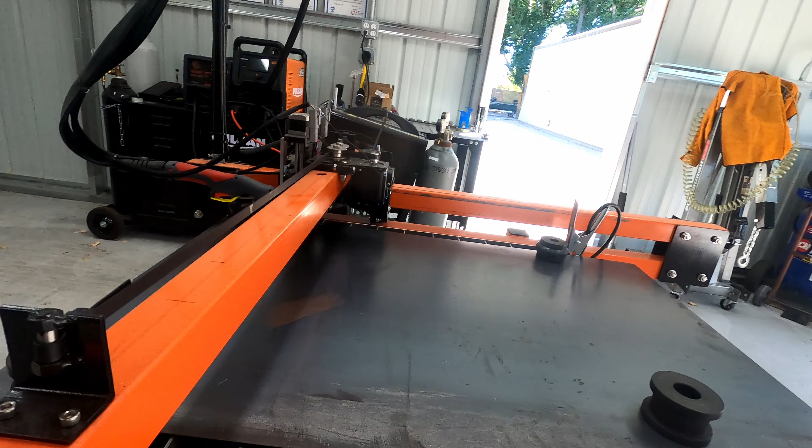So the day has finally come. We finally have power in our new mini fabrication shop. I've been wanting to bring you guys a follow-up on the JD's Garage DIY CNC plasma table. I went ahead and installed a drain plug on mine from some scraps I had lying around, so I can actually just drain the water there. But yeah, so what we're gonna do today, we designed something real quick, and we're gonna finally test this thing out without blowing a circuit breaker. We have dedicated power to the plasma cutter on its own breaker, and dedicated power to the machine. So let's get this video started, you guys.

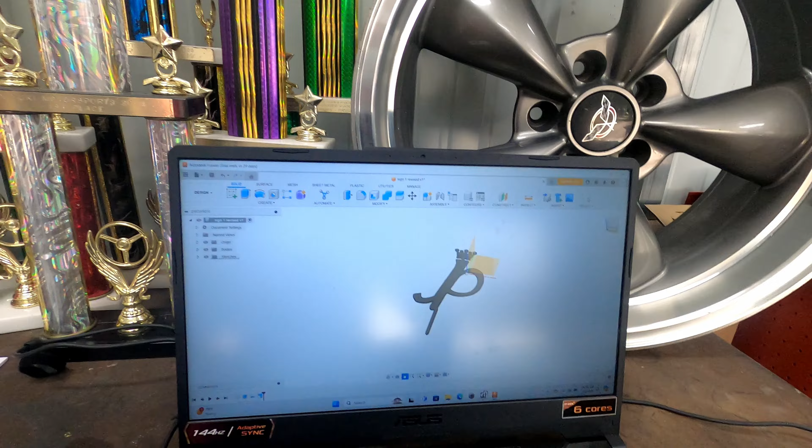Okay, so we got an imported file, something I drew up here of the JP logo. As you can see, we got it in 3 dimensions there, just so we can kind of keep track of what we're working on. We're kind of teaching ourselves CAD as we go along.

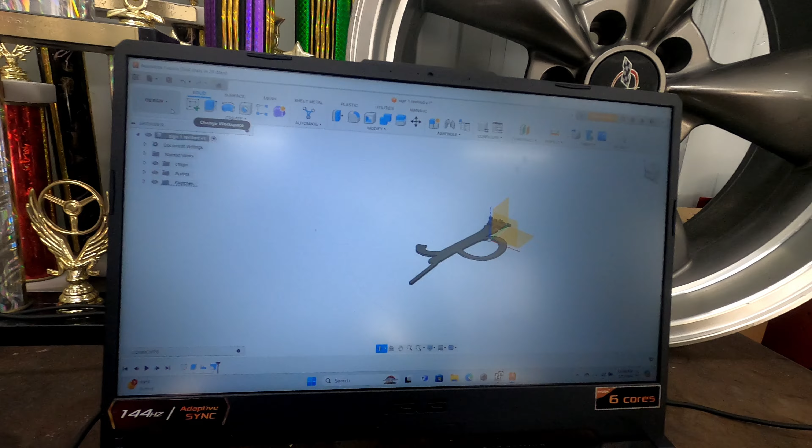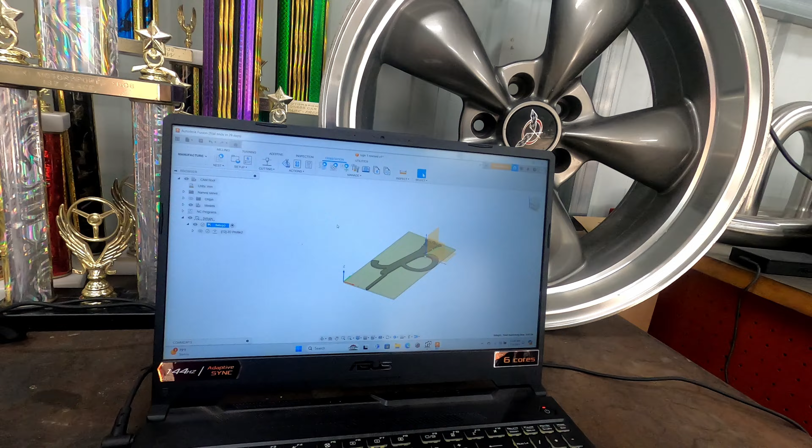So from here, you go into your manufacturing tab. Again, I'm just doing a quick overview of this. This is something you guys should have already watched on JD's Garage. They have an awesome video on how to set up your machine, how to get your G code, how to set everything up. This is in Autodesk Fusion 360, the free trial.

So what we're gonna do is get your G code. After you set up your machine and everything here, you want to make sure X, Y, and Z axis is on the right plane. That's very important, but again, JD's Garage goes over that already, so I'm not going to reiterate it.

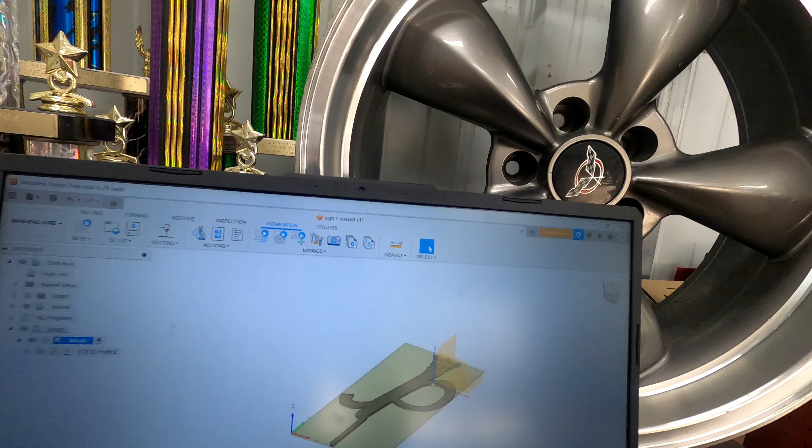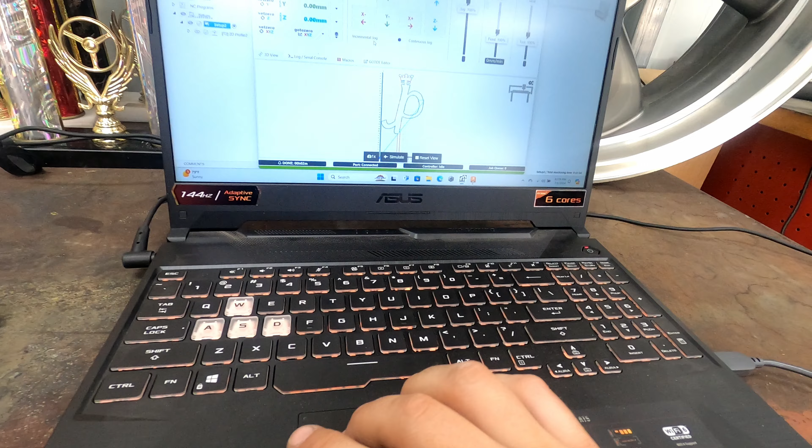So here you go to your post processor, and this will convert Autodesk Fusion into G code so OpenBuilds can read it. Once we have OpenBuilds open, we can upload the G code. As you can see, mine is already there. So you can do a dry run with this, which is probably what I'm going to do just to make sure everything's working properly. I don't have the machine on, so without the plasma cutter on, we can just hit run job.

So you'll have to mess around with your settings. I have my max speed set to 1600 on the X and Y axis. Again, if you're using the Z axis, it'll self-probe and touch off for itself.

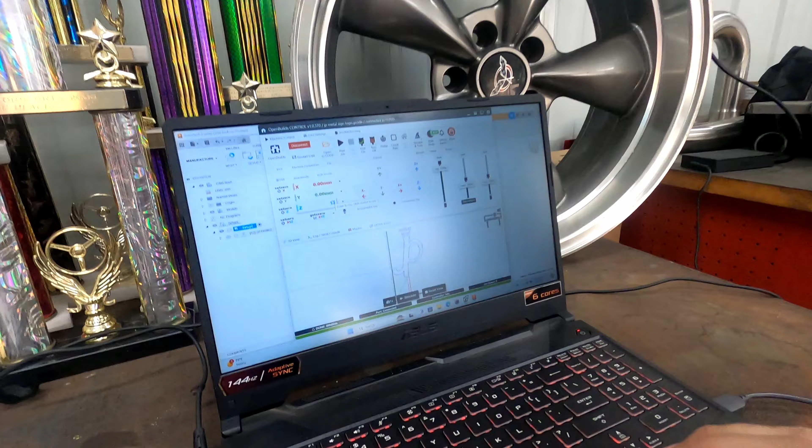Obviously that was sped up for you guys. It should return back to its home position there. It'll be 15 millimeters out on the Z axis because it raises itself. So to get it back, after your test cut, you're just gonna go here, go back to 0.00.

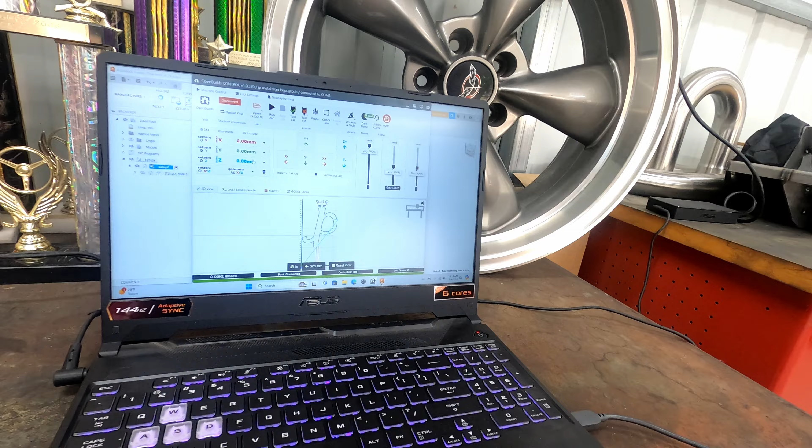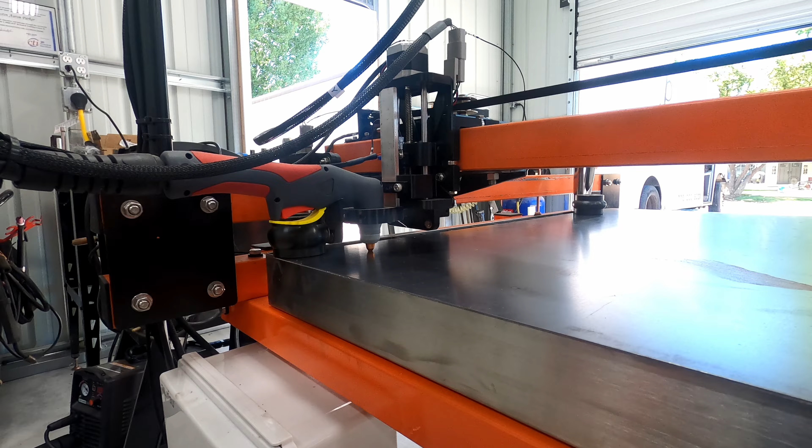And something to note for you guys: you want to make sure that your 0 is 1.5 millimeters above. I had this thing originally touching, and it was dragging, so I had to set my 0 at 1.55 to get it corrected. You'll have to mess around with your settings, especially like me - this isn't the straightest piece of metal here.

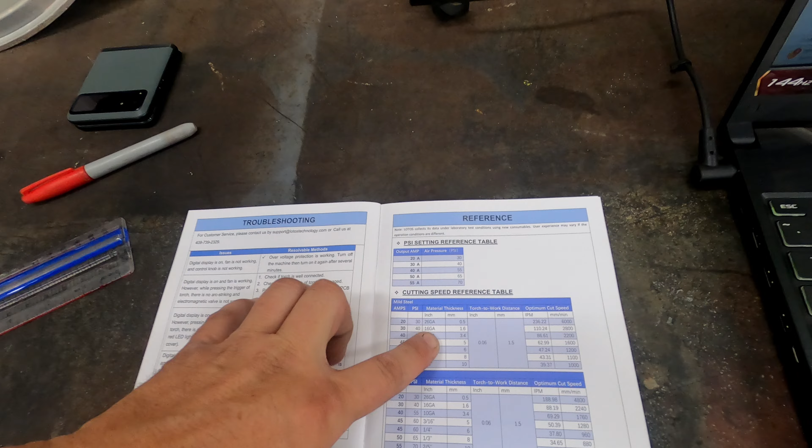On your plasma cutter, you're going to want to look at - we're working with mild steel here. This particular piece of steel is 16 gauge, so we want 40 psi with 30 amps for the cutter. This is for the LTP 5500D from Lotus. Again, you'll want to check your specs on whatever kind of plasma cutter you have.

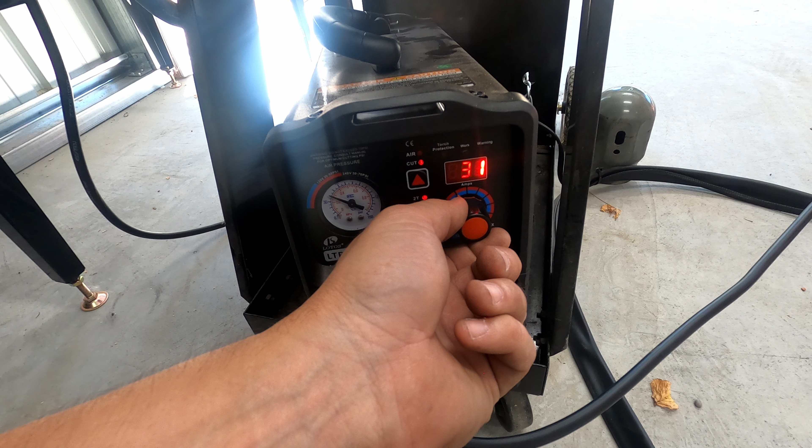We'll go ahead and fire up the machine, and we're gonna give it a go, guys. Let's see if I can find my power button here. All right. We'll go down to 30 amps as it called for. We're already at basically 40 psi. We want the 2T.

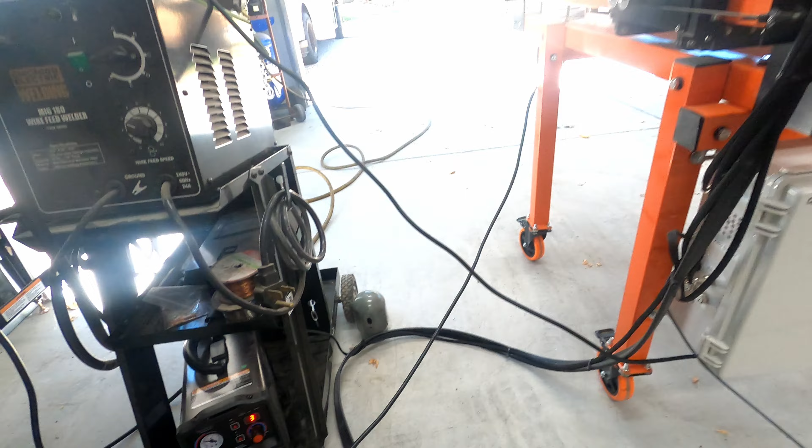Air's going, air's going. So if everything is as it should be, which we're hoping it is, there's no way of really knowing until we try it, guys. So we're gonna go ahead and run the job.

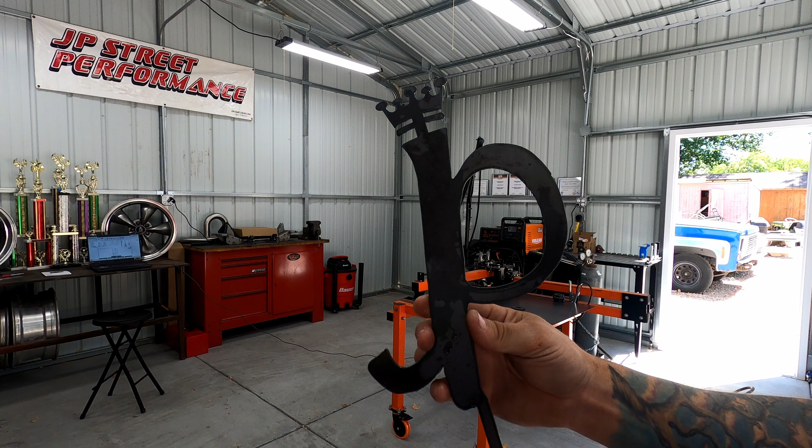Awesome, you guys, awesome. Let's get a good video of this. Look at that. Just awesome, I made a little yard sign. Very good cutting - my artwork, it actually followed my artwork pretty good. Very little slag, a little bit more in the tighter areas, as you can see here. Looks like my angle of cut is spot on, so the machine is really squared.

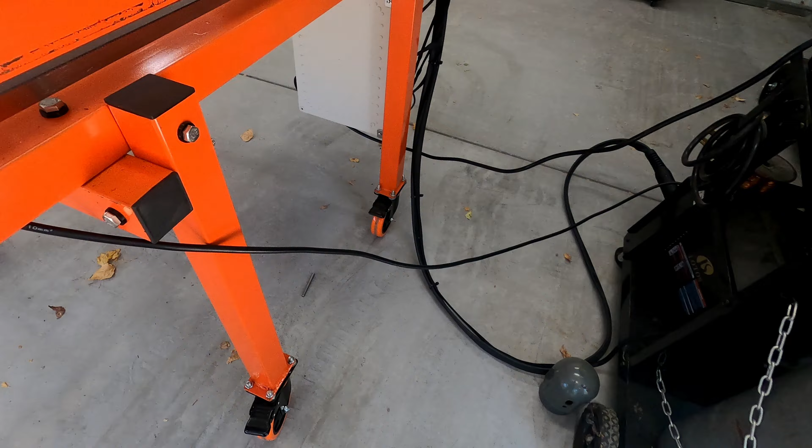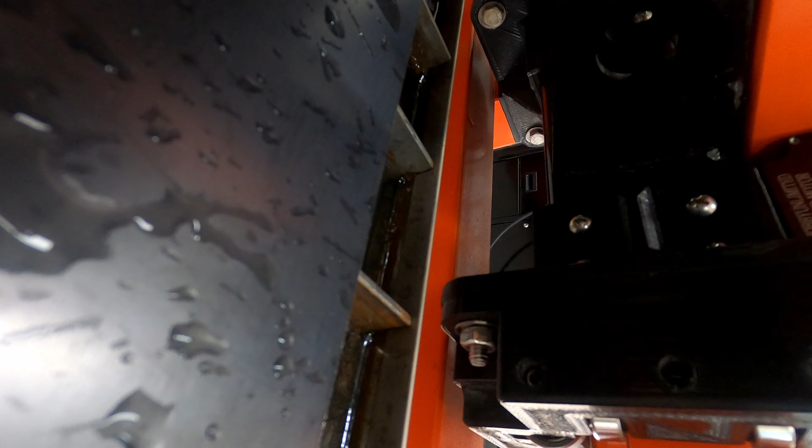So the only thing that happened during this run, and I've been having problems with this, I may have to reorder another part or make a 3D printed part. While it was cutting, and I didn't want to stop it, one of the rods from this side here kept falling out. Bearings are still in there, luckily, but we're gonna have to fix that. These things are basically as tight as they can be, but yet they're still having issues.

Absolutely stoked with how that turned out, you guys. Now we got a little sign to put out front of the new mini fab shop. So again, DIY JD's Garage CNC plasma cutter - very few issues I've had now that we got all the power situated in the new shop.